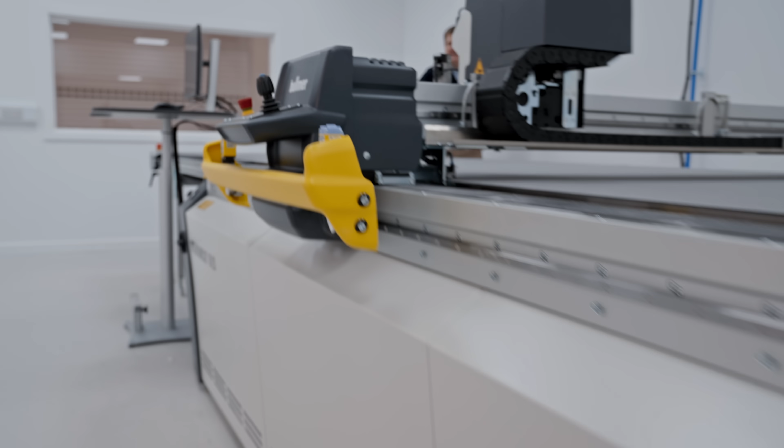Our composite laminating facility is now sealed, clean, and ready to produce composite parts for HX50. From raw materials delivered to goods inwards, these materials are then stored under strict temperature and humidity controls. Each composite ply is then precisely cut on our all-new composite ply cutting machine. Laser alignment is then used to place every ply into the tool accurately every time.

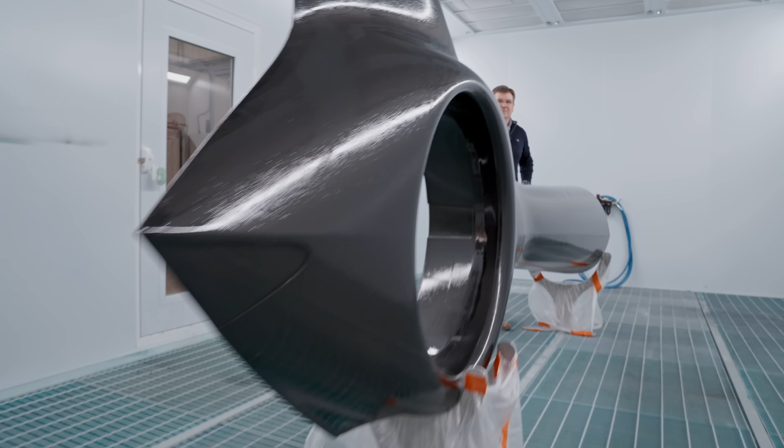Laminated parts then flow seamlessly from the laminating facility into our whole aircraft oven. Each component is precisely cured using our digital cure control system. Components are then demolded and prepped for paint before receiving their final paint finish. The painted airframes are then moved to the final assembly area.

With all of the construction now complete, we've cleared the space for all of the structural test rigs and our ground test area. Our Precision Aerospace Casting facility has been online since January, giving us an end-to-end capability to cast all aerospace casting materials, from high-grade structural aluminiums, alloy steels, to, of course, super alloys.

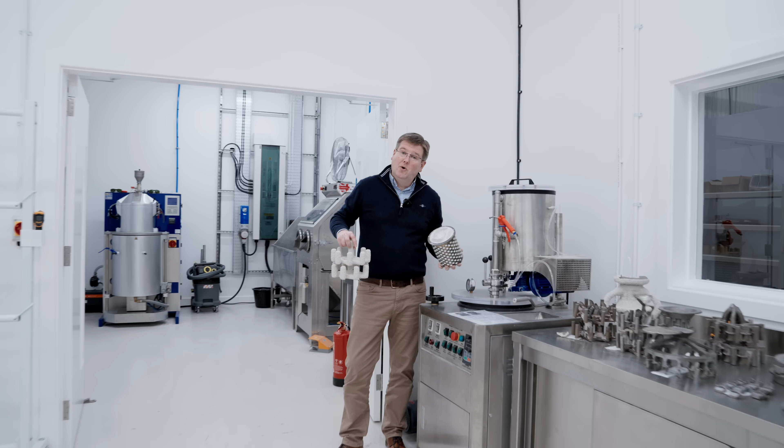We can produce investment patterns using wax injection molding or modern 3D printing. We can produce block and shell molds for all aerospace cast materials. We carry out wax burnout and mold preheating, and air, inert environment, and vacuum investment casting. Everything you need to turn raw material into precision cast components for GT50.

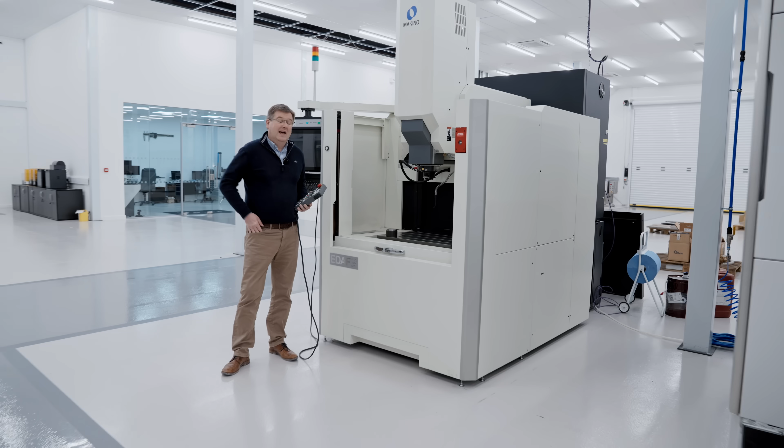To meet the demanding GT50 program milestones, we've added this vast Multus combined machine turn center. Our precision EDM machine is now online and ready to cut cooling slots in turbine blades. We've added a state-of-the-art micro-machining center to produce fuel spray nozzles, hydraulic control valves, and fuel control valves. Our fully calibrated metrology lab is now actively policing everything we make.

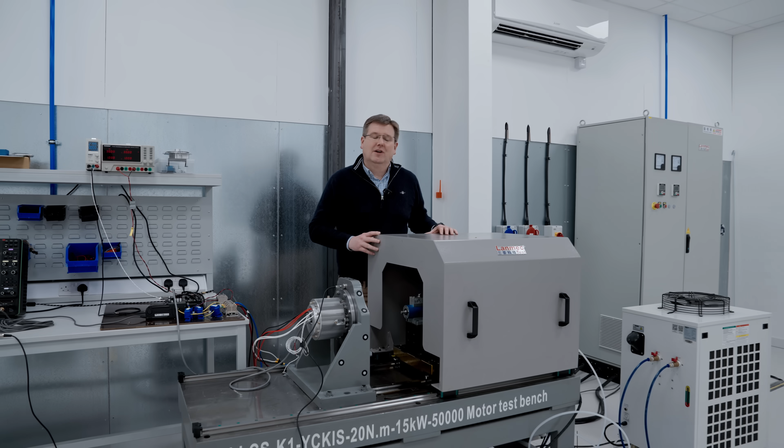We've commissioned our high-speed test rig, which enables us to test the starter generator system electrically, mechanically, and environmentally. And with the rig fully commissioned and the prototype starter generator in hand, we've now been able to commence a detailed and comprehensive program of testing across a whole range of physical properties of the device.

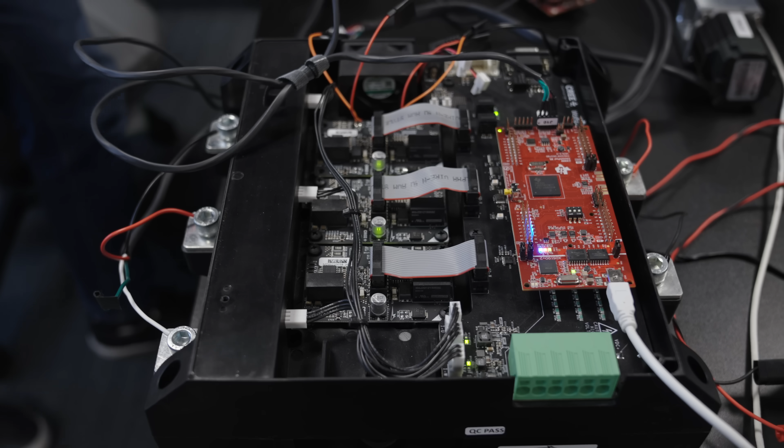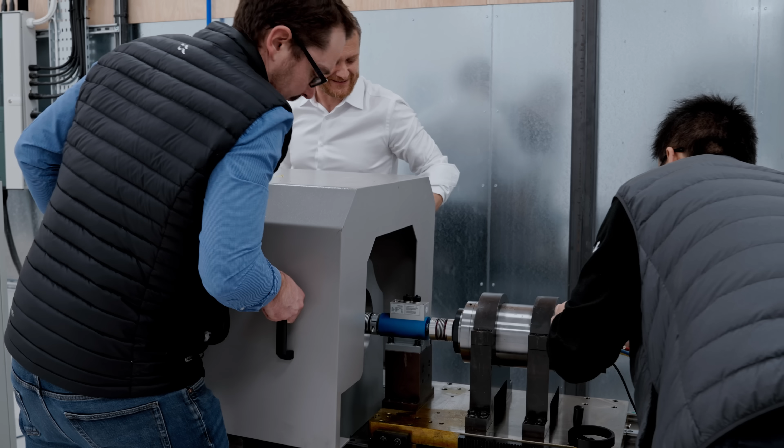We've started by electrically characterizing the system, allowing us to tune the control algorithms that run on the power management unit. We've also managed to fully statically and dynamically balance the system, complete all of the alignment between the starter generator and the prime mover, and then we've run the starter generator in generator mode all the way up to 40,000 RPM, and we've run the starter generator in motor mode all the way up to GT50 ignition speed.

I have to tell you that the first time we ran the starter gen up to 40,000 RPM, pretty much everybody that's been involved in the design of the starter generator, the electrical team, the mechanical team, were all in here like a bunch of nervous first-time daddies, waiting to see if the thing was going to work, if it was going to hold together. It was a real moment in the program.

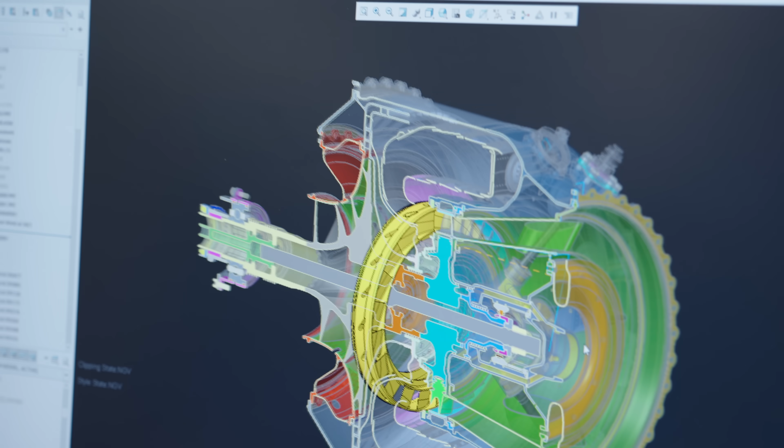Our compressor design has been both aerodynamically and mechanically mature for a number of years now. However, as other areas of the engine evolve and develop, that itself pushes changes back up to the performance requirements for the compressor itself. Over the course of the last month or so, we've subtly refined the design of our compressor to take account of the evolving needs of the engine.

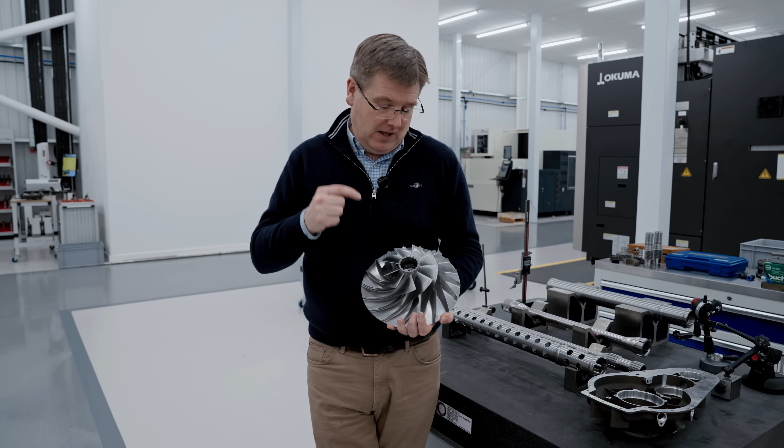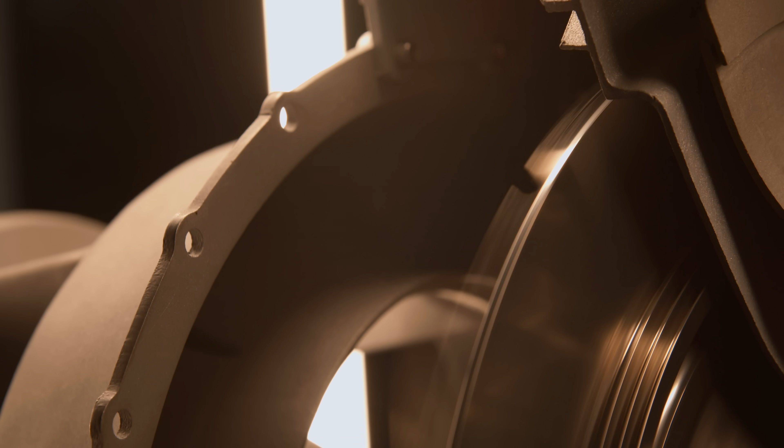We've improved the performance of the compressor, increasing the mass flow slightly, improving the efficiency by a couple of percent. We've improved the surge and stall margins, and we've managed the axial loads that are generated by this on the thrust bearings that hold the whole gas generator rotor in place in the engine.

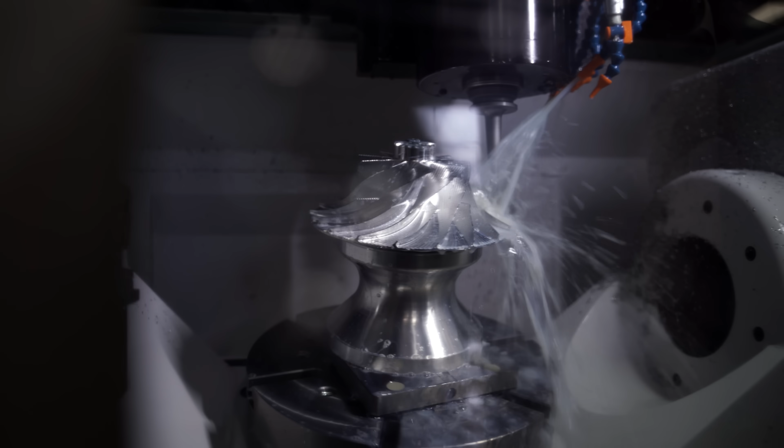We've also optimized the production process to minimize the machining time while reducing the overall tool wear that we encounter while making each and every one of the compressors. And we've developed specialist polishing procedures to squeeze every last little bit of efficiency out of the impeller that we possibly can.

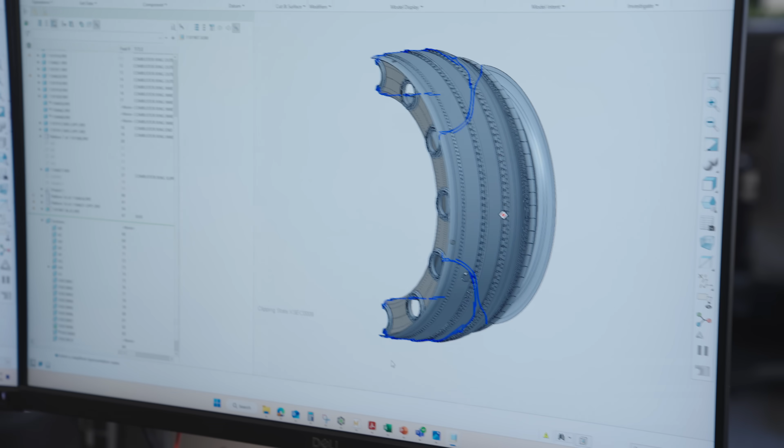Another area of the GT50 engine that has received extensive development attention over the last 18 months or so has been our annular combustor, and this work is now finally starting to bear fruit. The annular combustion system is a complex arrangement of superalloy sheet metal components that provide film cooling to maintain metal temperatures at acceptable levels and contain the entire combustion process while mixing the air and fuel and then diluting the products of combustion.

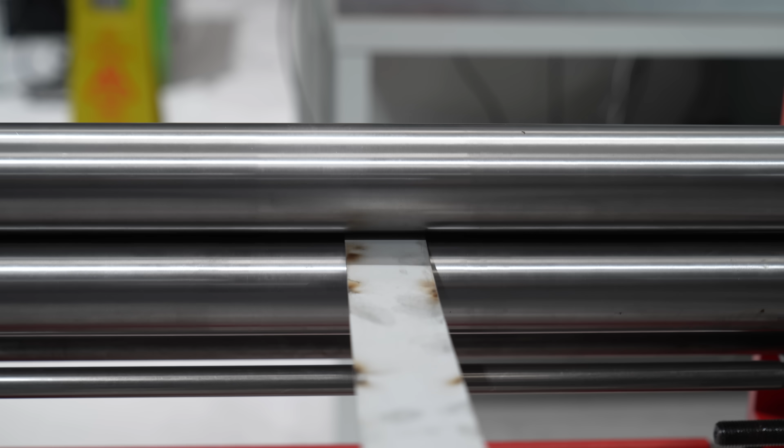The resulting geometry necessary to do all of these things is extremely complicated, and over the course of the last 18 months or so, you've watched us perfect every element of the manufacturing process to produce these complicated systems. You've watched us laser cut and roll rings to form the inner and outer annulus, laser weld rolled strips into rings, and qualify the strength of those welds as delivering parent metal properties.

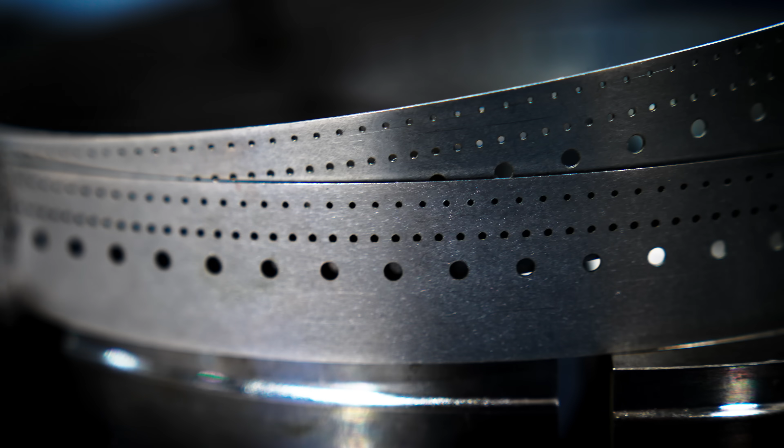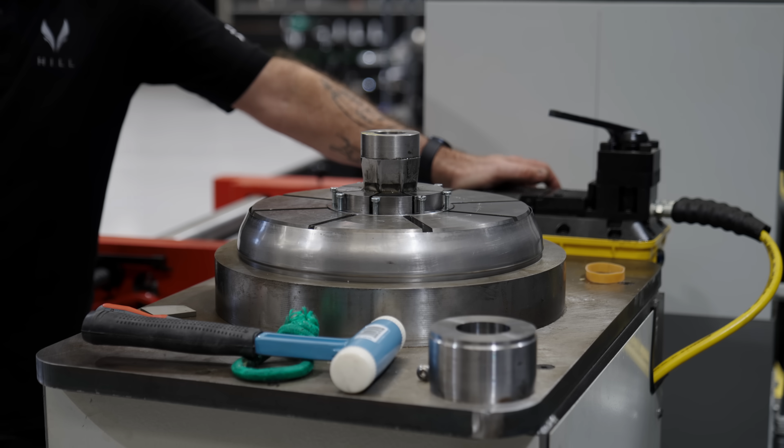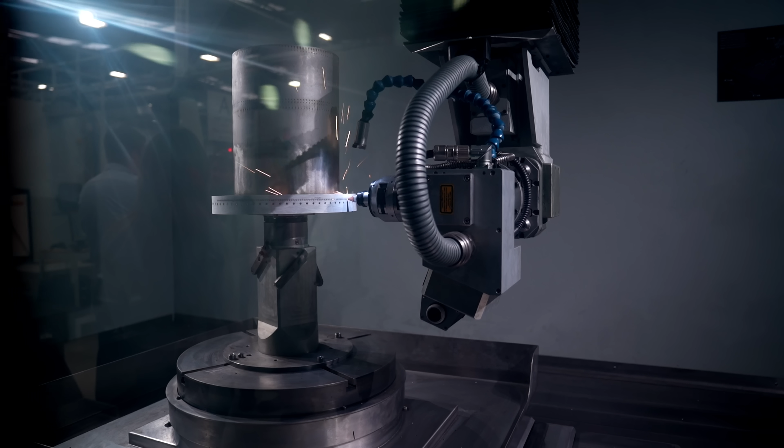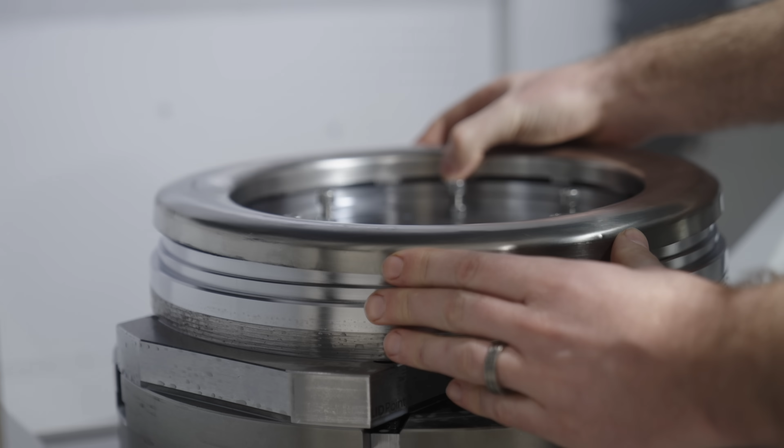You've watched us develop the tools and processes to form roll the overlapping profiles of the combustor, delivering film cooling over the gas-washed inner surfaces. You've watched us develop specialist equipment to expand form rolled rings to the correct diameter and roundness for assembly. You've watched us develop the assembly tooling and precision laser welding processes to assemble the unit as one, then either CNC drill or laser drill the 1,800 cooling holes necessary to balance the flow of compressor delivery air into the combustor to deliver stable, efficient combustion.

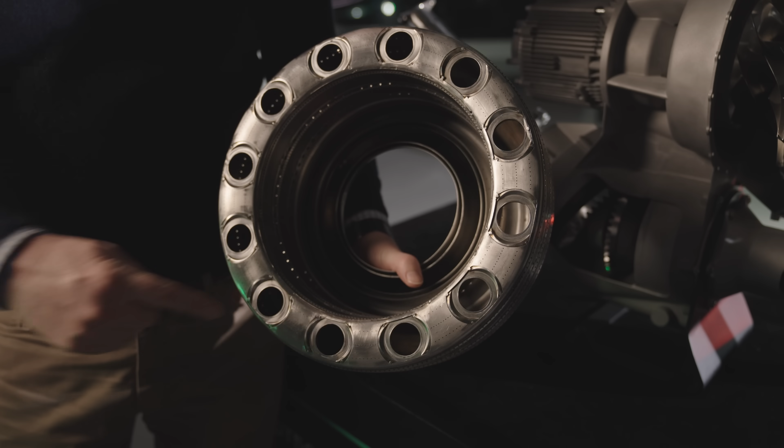And only when you've done all of those things can you build the very first GT50 annular combustion system. What I've got in my hands here is the very first annular combustion system for GT50, a culmination of 18 months worth of process development and design work to deliver a small, lightweight, inexpensive combustion system for our pioneering general aviation turbine engine. What you can see on the back of the unit here is the 12 individual swirler and fuel injection ports that promote a uniform distribution of fuel and combustion products around the annular combustor.

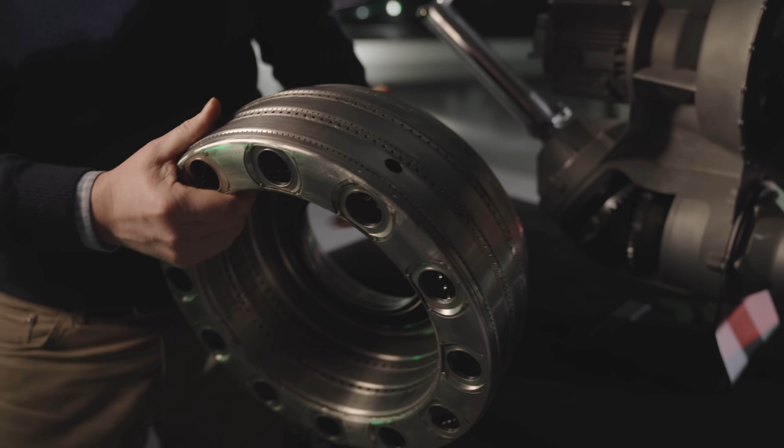When you look on the outside, you can see the 2 ports for the igniter plugs, the primary and secondary dilution holes that provide the key zones in which the combustion reaction takes place, and then the finer cooling holes, the film cooling holes that provide the cooling film of compressor delivery air over the hot gas-washed surfaces of the inside of the combustor itself.

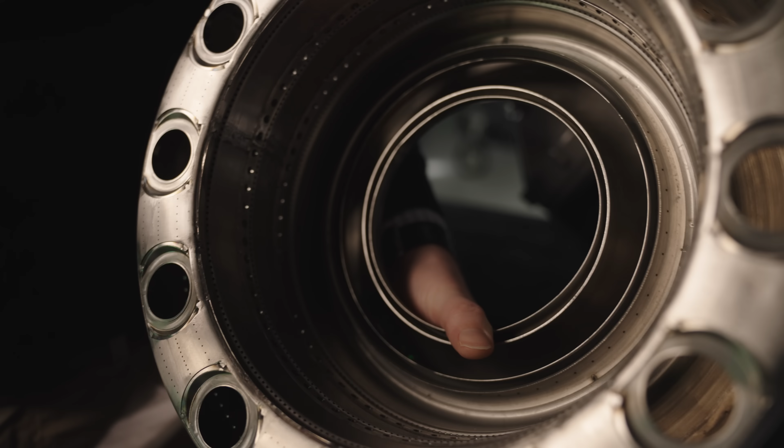Looking inside it, you can see the gooseneck feature that turns the flow back on itself towards the nozzle guide vane and then through the turbine stages, delivering the 500 horsepower that GT50 produces. What we've got here is a 3.5 kilogram annular combustion system manufactured by our vertically integrated manufacturing processes right here at PC1. Although the development of these processes has taken a little while, in reality, with all of the tooling and equipment now in place, we can produce one of these combustors from receiving raw materials to a finished assembled combustor in around 2 days.

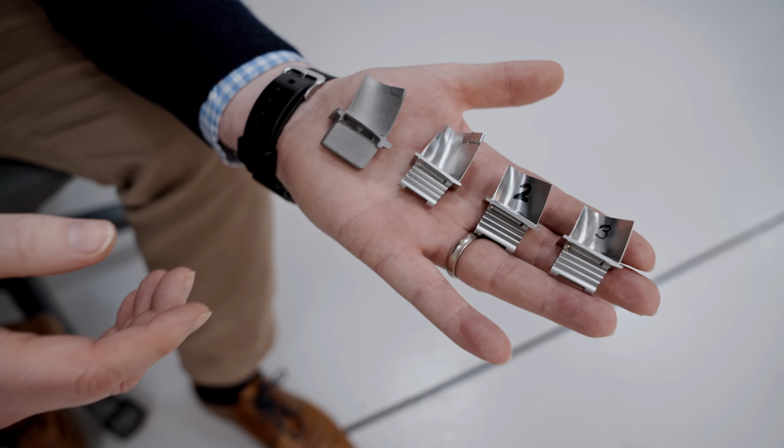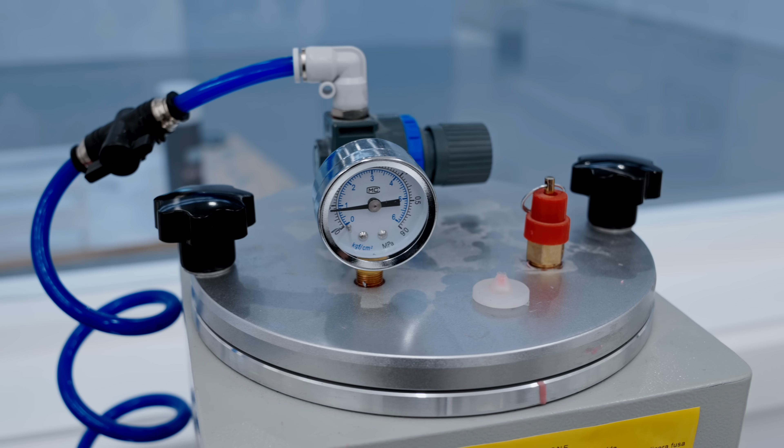Welcome to the Hill Precision Casting Facility. Here, we cast turbine blades, nozzle guide vanes, engine casings, and internal core structural components from a wide variety of high-performance aerospace alloys. The investment casting process involves the following key stages.

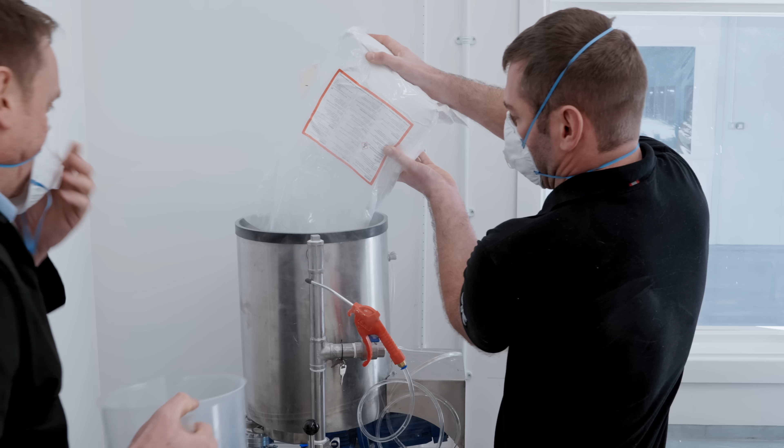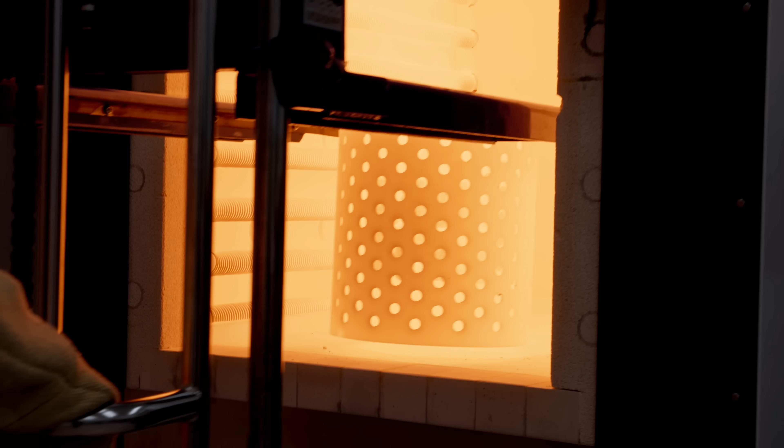First, we create a wax pattern using conventional injection molding techniques or modern rapid prototyping. We then create a ceramic mold using either block molding techniques or shell molding from a ceramic slurry. We then burn out the wax pattern from the ceramic mold, leaving a void to fill with molten metal. We then heat the ceramic mold to near the melting point of the metal to be cast. We can then melt the metal, usually under vacuum or inert environment.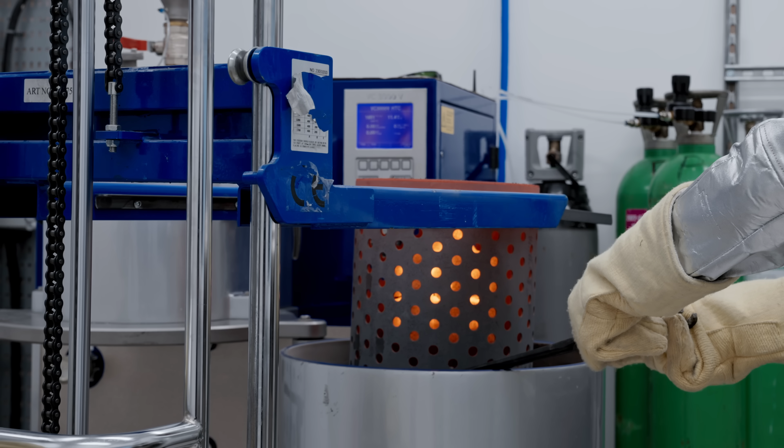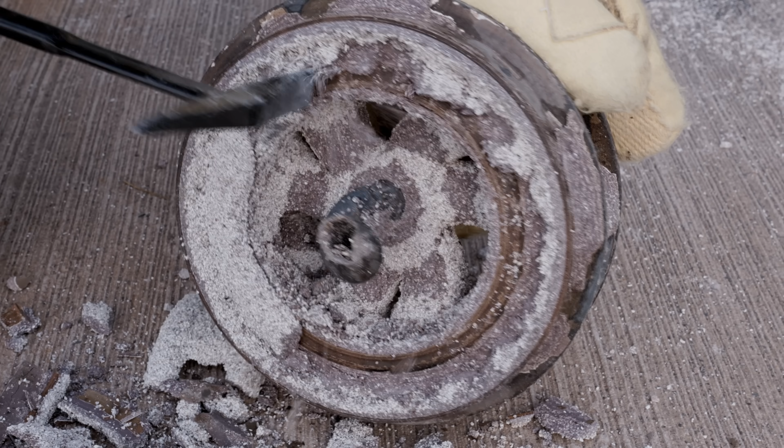The superheated molten metal can then be poured, again under vacuum, to fill the mold. The molten metal is then cooled at the correct rate to freeze and lock in the required crystal structure. Once frozen, the cast part is broken out from the ceramic mold and cleaned. The running system can be removed, the casting inspected, and then subjected to its final heat treatment to obtain the required mechanical properties.

Nozzle guide vanes represent a uniquely difficult challenge for casting processes. Not only are the blades extremely closely spaced and overlapping, they're mounted in inner and outer platforms that pin them together, which often contain complex hook features to secure the nozzle guide vane in the engine.

On top of this, each individual blade itself is hollow to allow cooling air to pass through the center of the blade. These voids need to be created with ceramic cores, which must be cast into the mold and then leached out with an array of very unpleasant chemicals.

Since coming online in January, Mark and the team have been developing the plethora of processes necessary to be able to cast these complex parts. And here is the very first GT50 nozzle guide vane cast in the PC1 casting facility.

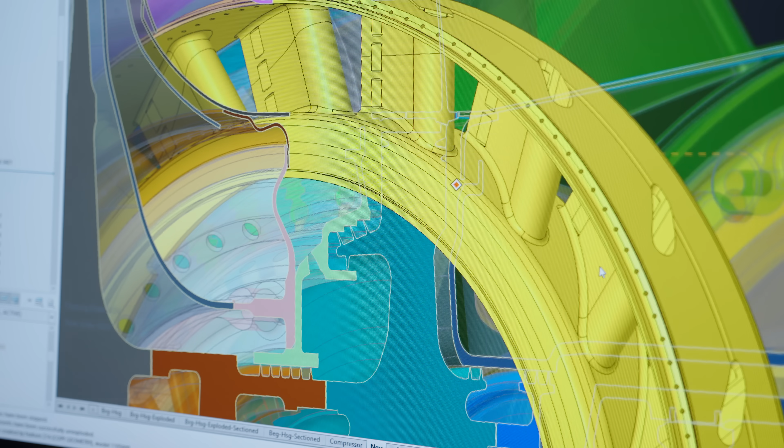So these inner and outer rings are generally cast oversized and then machined back. You can see each of the blades formed as an integral part of the casting. In this prototype version of the nozzle guide vane, we'll actually EDM the cooling slots into these to avoid the need for cores. In production, the cores will be integrally cast to make the process more efficient and to give us a more refined cooling channel.

Another crucial component that we've manufactured for the first time over the last couple of weeks is the cast bearing housing that supports the rear of the gas generator rotor shaft. This crucial component connects the secondary air system, the lubrication system, supports the bearings, the squeeze film damper and the spring bar, and connects the outside world with the core of the GT50 engine.

Of course, the most important and probably the most difficult part of making any turbine engine is the manufacture of the high integrity rotating turbine blades. Now we can produce those too. GT50 uses superalloy polycrystalline blades which provide a nice balance between high performance, long life, reliability and cost effectiveness.

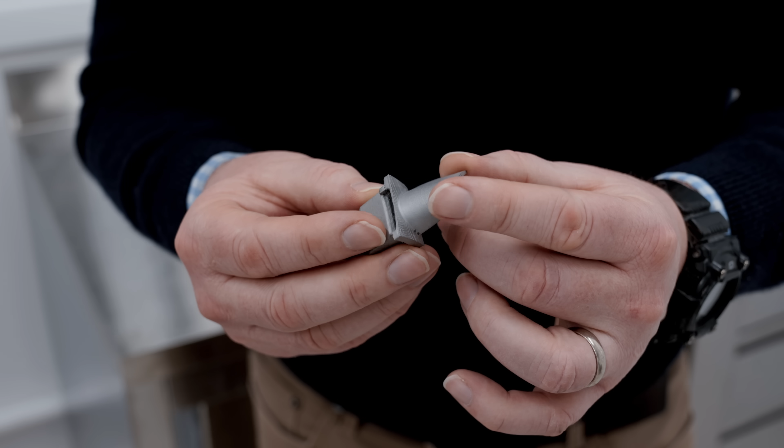While the geometry of the turbine blade castings themselves is somewhat simpler than some of the other shapes that we've had to learn how to cast, the integrity that's required and the quality of the castings needed for these components is absolutely second to none. Now we can do that too. We've created our very first GT50 high pressure turbine blades, and here is one of them.

In order to ensure that every part of the turbine blade, including the incredibly thin trailing edge, are adequately filled and free from pores and defects, we've had to develop an advanced feeding and running system to get the molten metal into each of the blade cavities when we cast these blades in batches. Mark and the team have perfected this over the last few weeks and are now able to reliably fill blade molds with high integrity superalloy material.

In terms of the next steps to take these blades and get them to the position where we're happy to put them into an engine, the next thing we have to do is switch out the rapid prototype patterns for wax injection patterns to get an adequate surface finish from an aerodynamic perspective. We can then characterize the shrinkage of the casting process and correct for that so the parts come out at exactly the size we need.

And then we can go on to calibrate the cooling rates and the heat treatment to refine the mechanical properties to exactly what we need for performance in the engine.

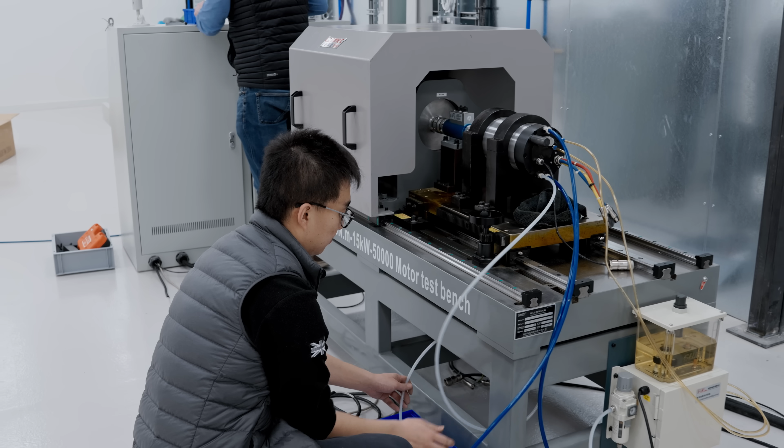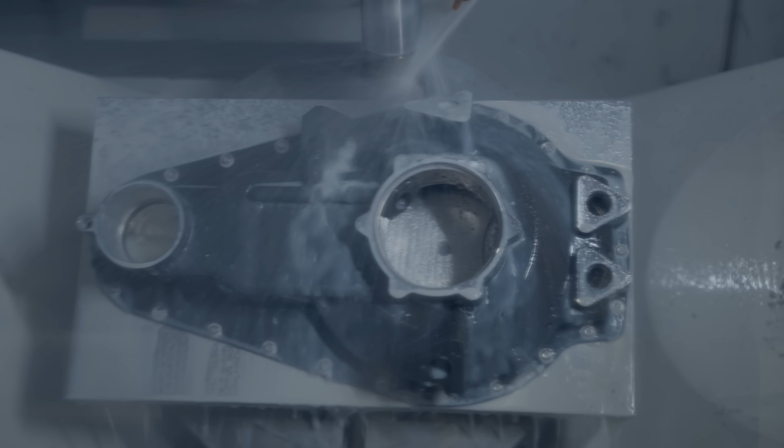In summary then, we've built the first starter generator and successfully completed the first phase of mechanical, electrical and control system testing. We've validated the in-house designed power management unit hardware on the test rig. We've built the first casings, drive shafts and bearings for the speed reduction gearbox. We've validated the first half of the production gear manufacturing process. We've now completed 80% of the components for the speed reduction gearbox test rig.

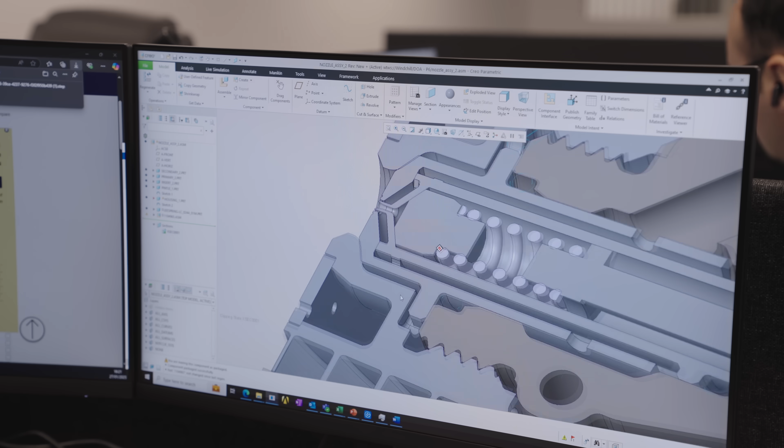We've completed the first GT50 annular combustion system. We've completed the design for manufacture on the first production intent fuel injection nozzles, sourced prototype parts for testing, and acquired the production equipment for series production of them.

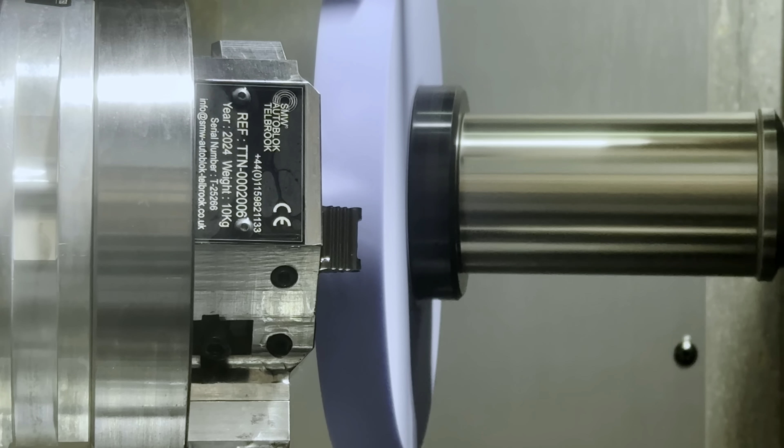The Hill Precision Casting facility is now online and has cast the very first GT50 turbine blades, nozzle guide vanes and bearing housings. We've ground the first fir tree roots for GT50 turbine blades, completed full geometric inspection and cleared all tolerances. GT50 is coming fast and more importantly on budget. At a time where everybody else's prices are rising dramatically, ours are robustly controlled. Vertical integration works.